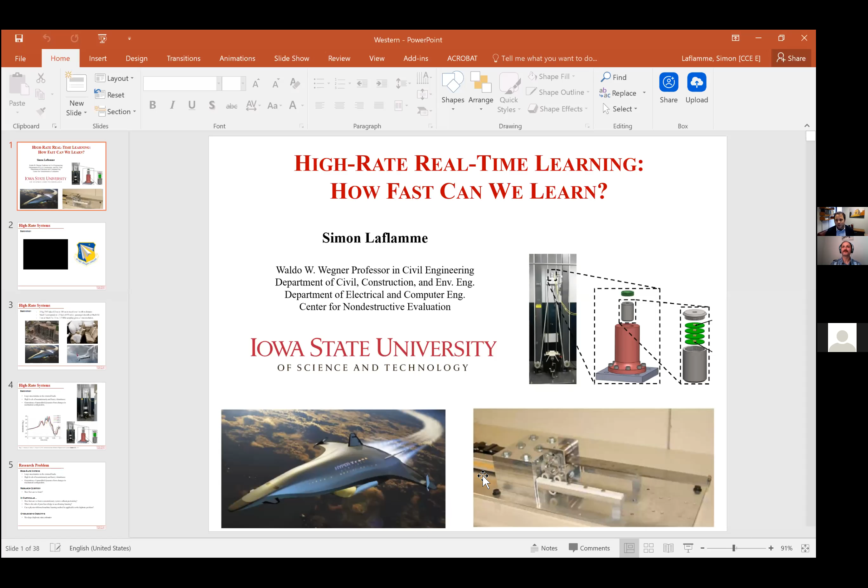So I suppose I have an hour for this talk, right? Total, like, so what, 2:30? Yeah, usually we go with 45 to 50 minutes, and then we have about 5 to 10 minutes for Q&A. I will try to be on track. Sure, I also sent you the slides. If you can allow me to share the screen, that might be easier because I have some videos. If some of you want to volunteer and put your cams on, that's much easier than talking to a black screen. The problem is that when everybody turns on the camera, we might have some technical issues. You should be able to share it. All right, perfect. I like to do some humor, but it's hard to make humor with high rate systems. Okay, I'll get started then.

So my group here at Iowa State does work in both health monitoring and control. Briefly, in control, we like to design and imagine new devices for reducing vibration in buildings and algorithms for feedback control. In terms of health monitoring, we do work in sensor development mainly. So we invented this sensing skin that we deploy on structures, and of course, the algorithms that link signal to decision making.

And that's important for today because we've merged these two topics together to address this challenge called high rate structural health monitoring or high rate state estimation. This high rate thing is a new topic. It's a niche in the whole realm of state estimation that was pioneered by us and the Air Force Research Lab a few years ago, and additional colleagues started to get into this, like Dr. Sadhu at Western. So that's how I ended up getting this invitation. Thank you for having me here.

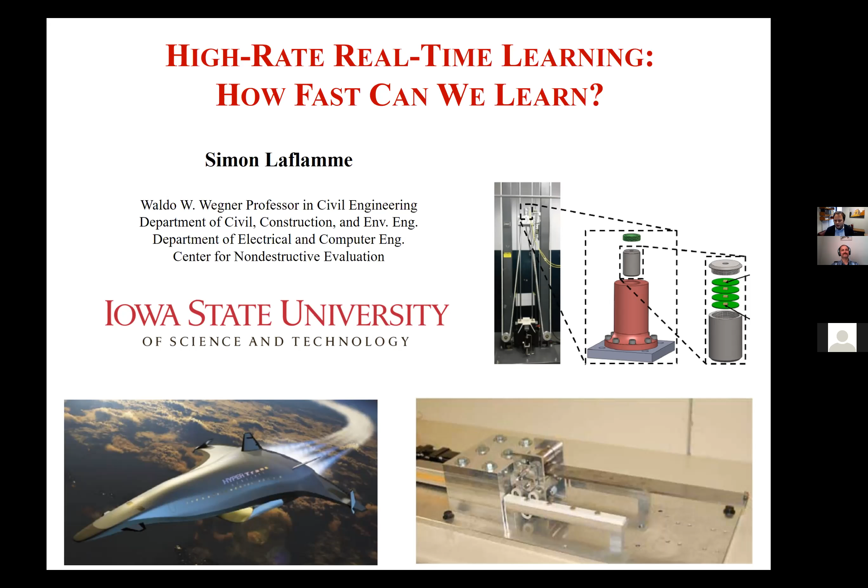So before I start with this whole definition, let me show you a video. You see the video, right? Good. So that's a high rate system right there. It's a piece of weaponry going through three different concrete walls.

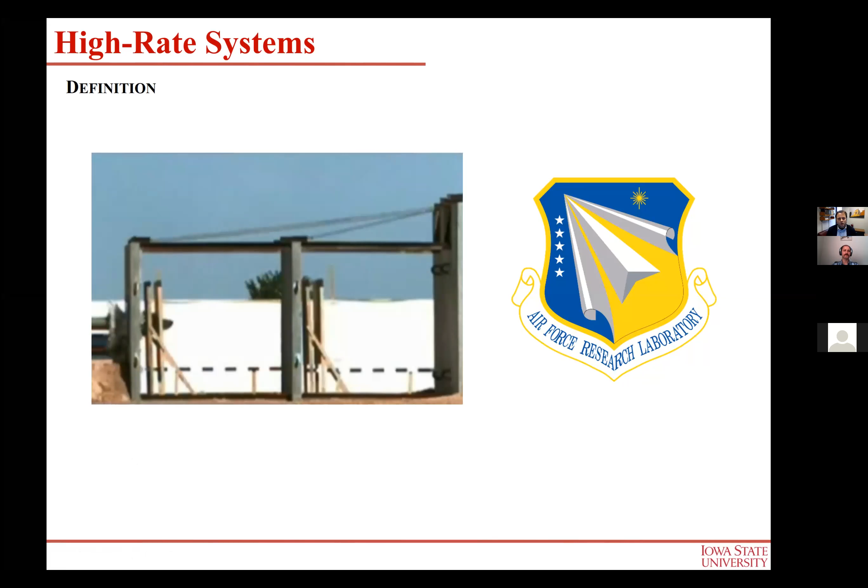And I'm a civil engineer. Of course, look at this, like, oh no, the walls, right? So we're not trying to monitor the concrete here. Instead, we're trying to monitor the device itself, so the missile that goes through those walls.

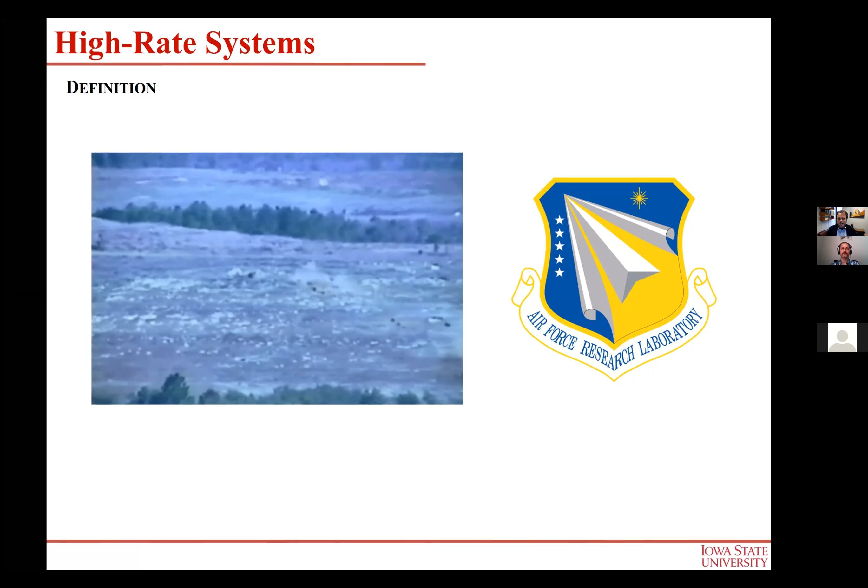So one of the challenges, to give an example through this slide, is do we have enough time to estimate the health of the weaponry between two targets and make a decision? For example, once you go through a wall, do we have enough time to say, hey, that's damaged. It shouldn't go further, so do not detonate, right?

So in terms of war application, that's what would save lives by not detonating next to schools and weddings and so on, or what they call smart detonation. So that's one of the key examples that we like to give when we talk about a high rate system, right? That kind of resonates with people. But it's not just about missiles.

In terms of civil engineering, and I suppose that most of you are, that's one of the main concerns we have: blast mitigation. And I've seen, in terms of control theory, some colleagues have come up with great ideas. For example, a balloon that could be inflated when there's a blast. So there's a blast that comes, you inflate this balloon that absorbs some of the energy coming to the building. So that's good, that could work.

The problem is we don't have time right now to do that. We just need time to understand there's a blast coming to you, quantify it, make a decision, and tell your system to inflate, and also inflate the system, right? So that's kind of a high rate event. In order to be able to enable this, we need to be able to develop those sensors, algorithms, decision systems, and name it. So we do work on algorithms on our side.

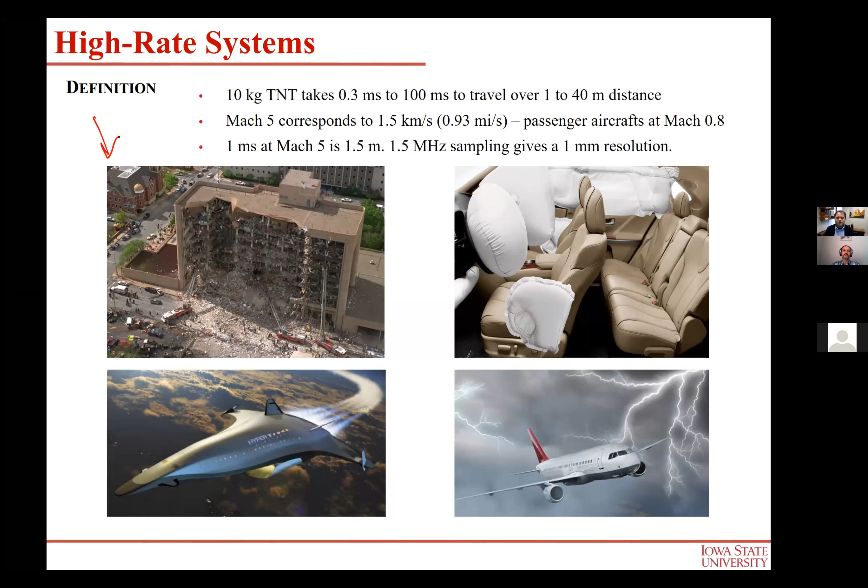Airbags. Suppose that you want to do adaptive airbag inflation based on some feedback from acceleration and the weight of occupants. Well, you could do that through those high rate algorithms. So that's another example of high rate that we've done in a lab with the Air Force.

So essentially what differentiates those systems from others is that we have 3 key challenges that are combined. The first one, if you imagine those missiles, is large uncertainties in external load, right? You don't know what you're going to go through. You don't know what hits you. If there's a blast, you can't really understand the wave coming at you on time. And from those big events, there'll be a lot of disturbance, very heavy disturbance. You will incur damage and changes in dynamic systems, and that will generate unmodeled dynamics.

So these are perhaps the most complex systems that you can estimate in life. However, because of the nature of the system you have, the requirements on accuracy are not that high, right? What you want is to make sure that you maintain operations. You want to make sure you maintain structural integrity. So you can give up on accuracy to get some computational time.

So this example is what we call a drop tower. I'll put a video here. So there's a canister installed right here. You have the canister on the bottom.

I just take for granted that you can see my cursor right here. Oops. I don't know if you guys, that needs to go away. Hang on. Okay.

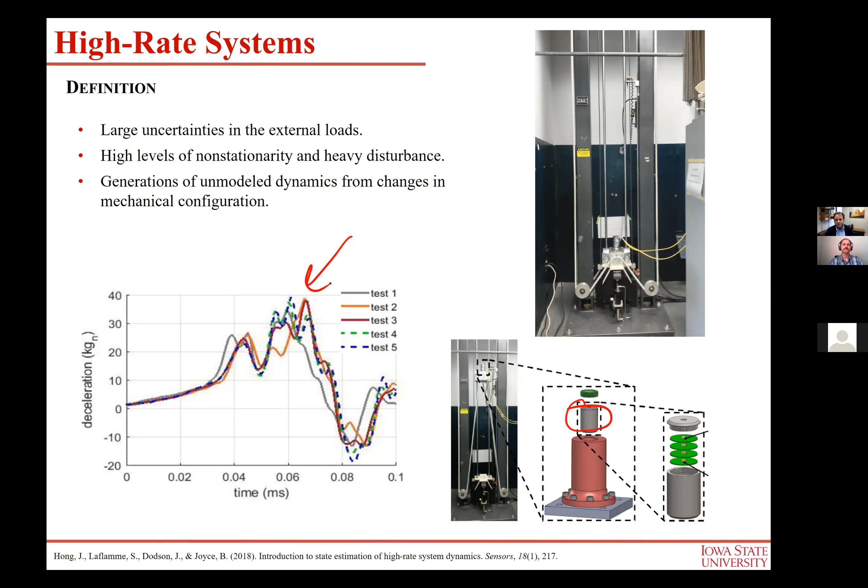So based on this whole challenge, what we're trying to do here is establish how fast can we learn. And that's kind of the purple unicorn. I don't want to spoil it, but the conclusion of this talk is we still don't know, right? So we need to do work towards that. But where we're trying to work is, can we learn a non-stationary time series without any pre-training? We're telling ourselves the system is so complex that we can't really pre-train, or maybe, as you will see, we'll give ourselves some chances. Well, maybe we have a little bit of knowledge, but can we essentially learn almost everything from the edge?

And that's just a comment I just said. We'll give ourselves some chance here, saying, hey, there's an opportunity. We have some bit of physical knowledge. Does that help or does that hurt? Intuitively, it should help, but how much does it help? And that's something we'd like to quantify as well. And merging these two together, we're going to start talking about physics-informed machine learning to be able to solve the problem of high-rate state estimation.

And if we can do all this, then eventually, as we complete the research, we'll come up with a high-rate state estimator. And the state estimator, for example, is being able to tell you the stiffness change, being able to localize damage and quantify it. Not just saying there's something wrong, but going to the point we can make some better decisions with the system.

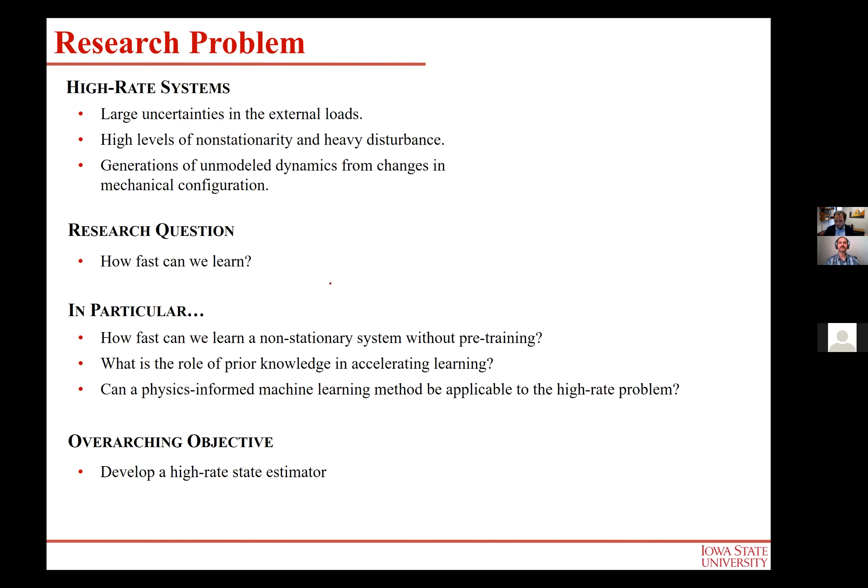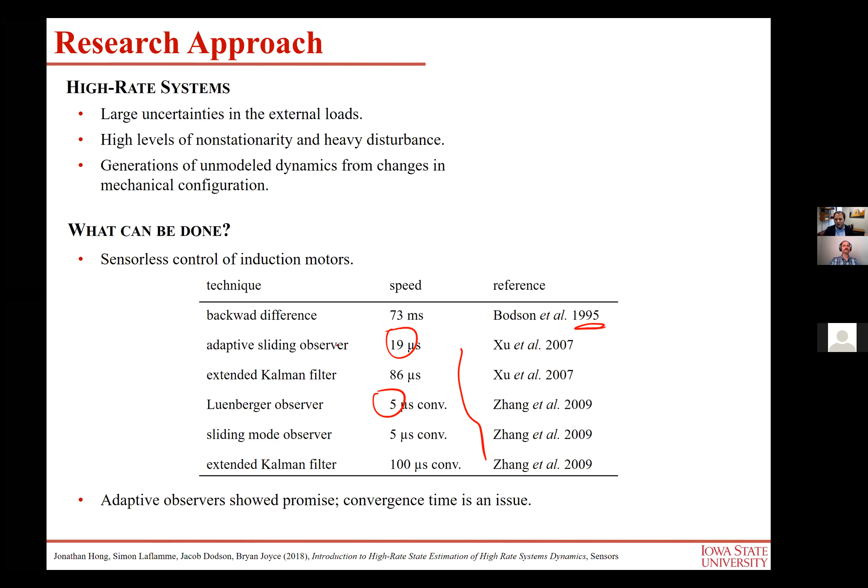But as we dug through literature, we saw that there was hope, and most of the hope was located in the realm of adaptive observers. And that makes sense, right? An adaptive system is one that can adapt to changes in the environment. And if we see non-stationarities, then technically we could come up with an observer that could adapt to that. So we're saying, well, okay, we need some sequential system. And that's without surprise what we like to do here, real-time learning. So of course, we had to find this as a conclusion.

And then we built this research program with a couple different sponsors as time progressed. But we spent some time about 3 or 4 years ago to define this high rate problem. So that was the first few slides I showed you. So where you say, what are the challenges? What do we need to do? And then we look at different

sides of the problem. The first one that we looked at was, can we learn a time series on the edge without pre-training? So it's not really time series prediction, but more time series estimation. Nothing to do with state here. Just looking at a time series and can we learn it? And it is a big gap between learning a time series and saying there's damage and quantifying it.

So a bit difficult. And then we'll move a step further and say, okay, let's try to inject physics into that to come up with a better observer. And then the other is to come up with those physics-informed fast state estimators. So I'll give you an example of that where we've merged these two together. And we're yet to develop this, but based on the knowledge and discoveries and the research, we will soon jump into an idea of predictive high rate state estimation.

It's not about knowing state right now, but what is the state in the future in a few milliseconds coming to be able to make better decisions. Right? Time is an issue here, so if we can predict the future a tiny bit, that's going to help us. If I know the blast is coming and I can give the system 0.1 milliseconds to react a little bit more, then that'll be very useful. And there's the overarching objective here. So at the end, if we put all this together, then hopefully we can have this high rate state estimator.

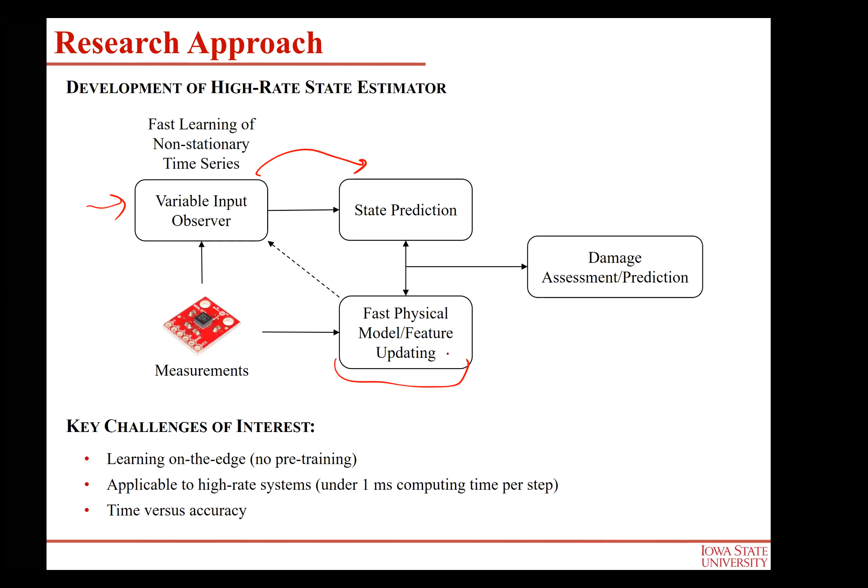So on the other hand, we work on fast physical model updating. So having some cheap physical models, easy to update, fast, not quite accurate, but at least fast. So that will give us that little leg of physics that we need to merge these two things together. So state prediction, physics, and then we can come up with damage assessment. I put a link here. That's physics. So if you do have physical knowledge, why not give it to your observer to be able to accelerate convergence?

So I will start showing you a bit of research in those areas. Key challenges you have to keep in mind: first is learning on the edge. That's important to us. That means no pre-training. And that's a problem you find in civil structures. It's hard to test a full-scale structure.

It's very expensive. So if you do work in health monitoring, for example, like the example of the bridge, you put sensors, but to understand the signal, you don't have the luxury to take the bridge in the lab, test it, do several damage types, and then try to relate sensor data to damage. So pre-training is difficult. Machine learning has a lack of labeled data.

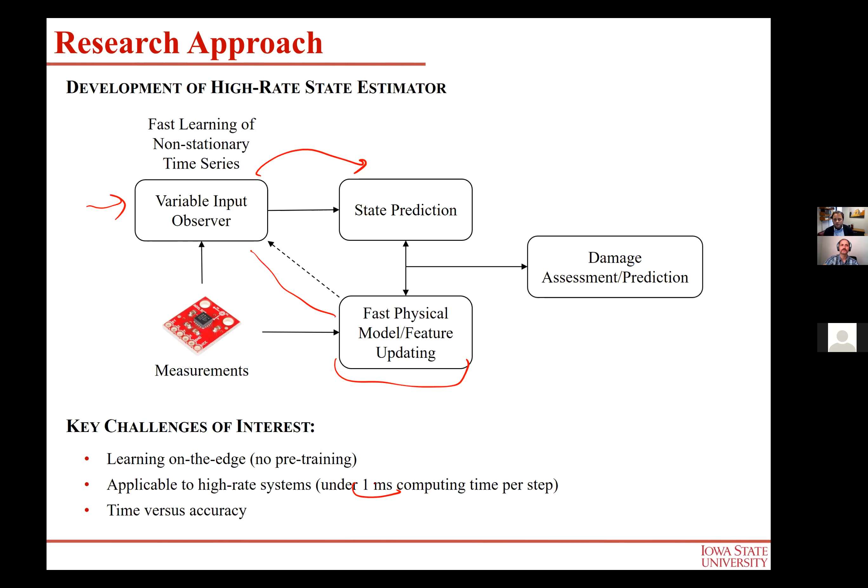We will give ourselves a very tight computational time challenge, under 1 millisecond. So we call that sub-millisecond decision systems. And we're going to try to quantify computation time versus accuracy. So that'll be quite important.

And we also have, on the other hand, a model. So what I call a cheap model for the system. So it's easy to adapt. Spring mass, right? Model this as a single degree of freedom, one mass M, one stiffness element K, one damping element, and that's it. So as we get measurements, we update the physical model, the adaptive model, until we achieve agreement with the measurements, right? So we look at the estimation error and we update the system.

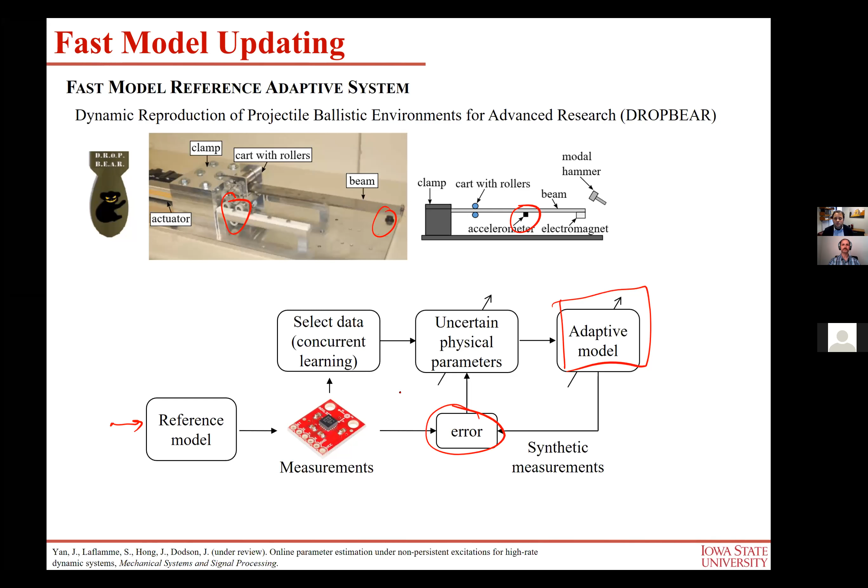So we do it in a bit more detail here. The way we build this cheap model, we borrow from the field of reduced order modeling. It's called here SEREP, that specific algorithm. So with SEREP, you take where the sensors are and you build a representation based on the sensors. And to be a bit brief in explanation, you have one mass where the sensor is, and you link the rest with spring elements. You try to come up with properties in your state space matrix that would match the dynamics of your system. So we do that.

The adaptation rule was based on sliding mode theory, so something very traditional, something fast. What's quite important here with those systems is the excitation we apply is not considered as persistent. So persistent excitation is one that can excite most of the main modes of the system, such that when you try to adapt the algorithm, there's only one unique solution that exists. So if your excitation is not persistent, then it won't work. You won't be able to converge to one solution.

So to deal with that, we looked at what's called concurrent learning. And the way concurrent learning works is that you build a vector of measurements. That's what would select data. As time progresses, as you get a new measurement, you decide whether this new measurement is useful to you in terms of information. And if it is, then you put it in your vector of selected measurements and you remove the least important measurement in terms of information. So you carry this vector of information in your system that you feed into your algorithm.

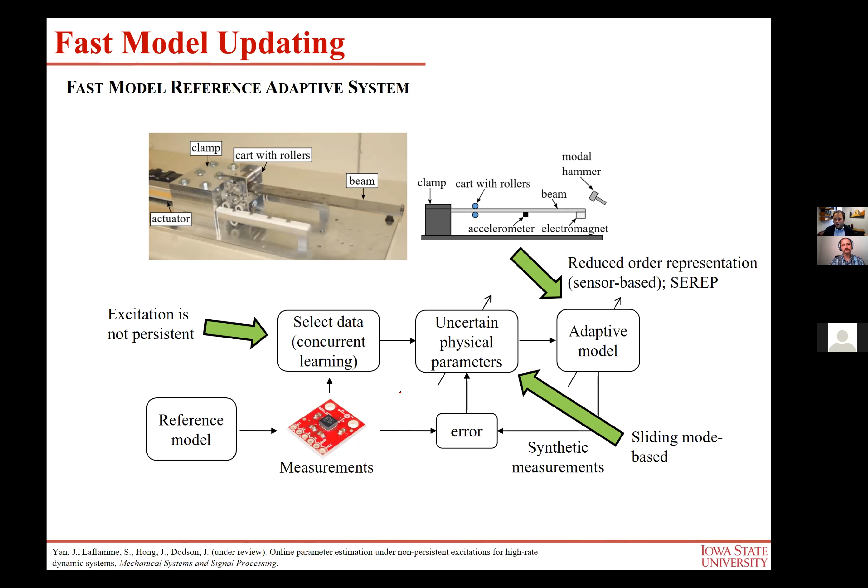So we did some simulation to make sure that it works before we applied it to the system. We looked at a single degree of freedom toy example, mass stiffness damping, and we changed the stiffness at one time. Actually, we didn't even change the stiffness here. What we've done is say the stiffness is unknown. We asked the model to build itself to find what is the right stiffness.

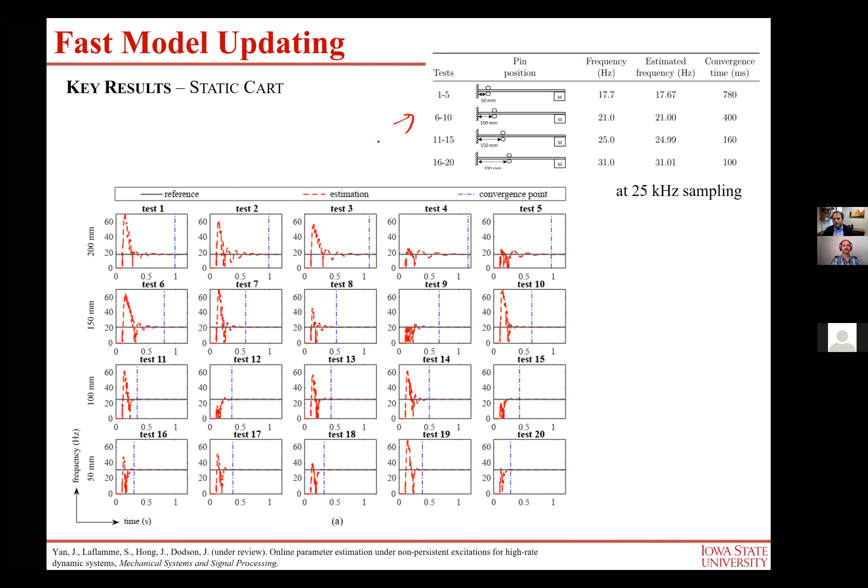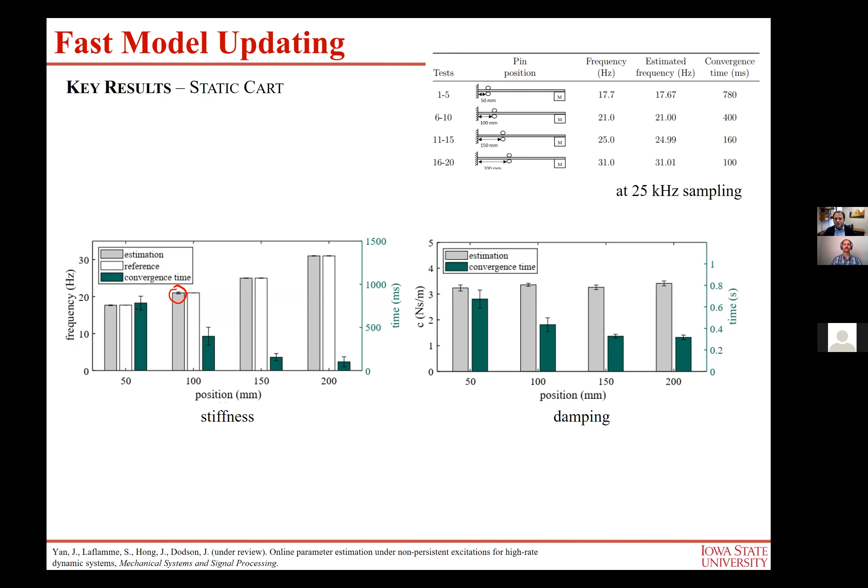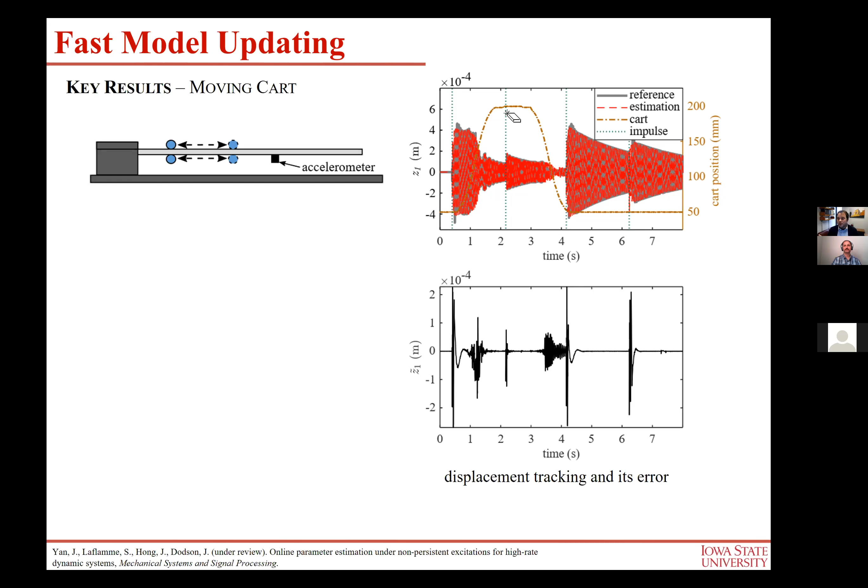So this very messy graph, the top right is the reference versus estimation for the displacement, Z1. There's a match. If there was no match I wouldn't show it to you, right? But it works. So we're able to match the displacement. But that doesn't mean much. Again, it's just signal. What we want to do is be able to detect where the cart is. That's our state estimation. The bottom graph is the error. You can see the error, some chattering every time there's an impact on the system, but it does converge right after.

If the system doesn't converge fast, then you do lose accuracy. So that's what you have to gauge in the field. Are you willing to give up that much accuracy to be able to be very, very, very fast in your decision making?

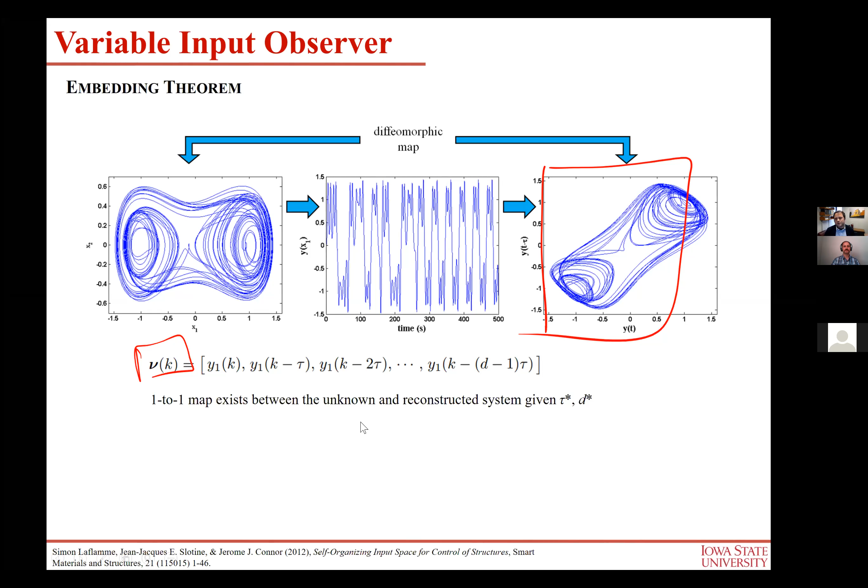We use a wavelet neural network in that case. But the input that goes to it changes as a function of time. It's not just a single type of input. We build that every time. So sometimes we might have the acceleration at time t minus 10, and another time t minus 55. Right? So the type of input will change. And again, it's to characterize the time series a bit better.

So as we progress, what we do is we have some signal, could be the output as well. And the algorithm here will look at the topology, the topological space of the time series, and say, well, maybe tau equal 5, d equal 3 is better. And it's going to recommend an input space. And then that goes in the neural network, estimation, adaptation. It goes back and says, oh, maybe we need a new input vector. Keep going on and on.

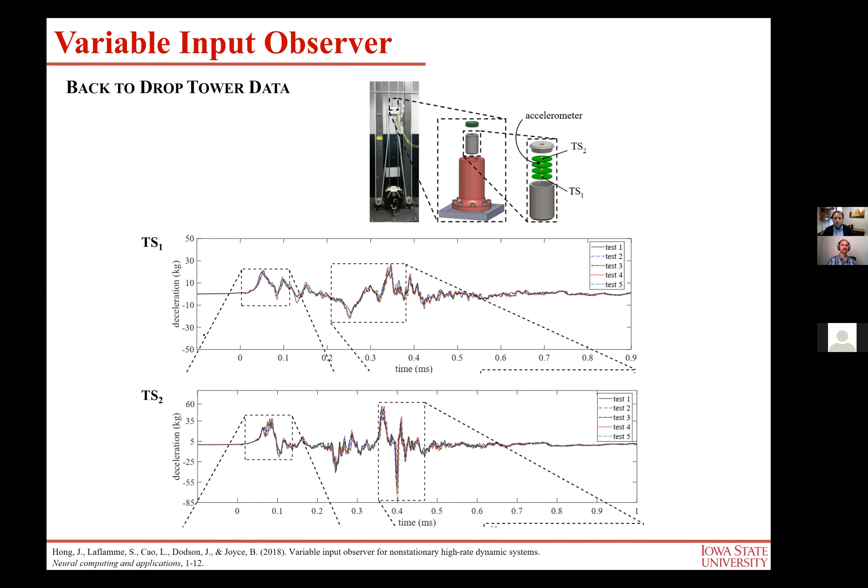And you look at the time series at the bottom, they are different between TS1 and TS2, different dynamics. So we try not to train, but to learn in real time TS2 using TS1 as input. That was the main challenge. Look at this. Hey, it worked.